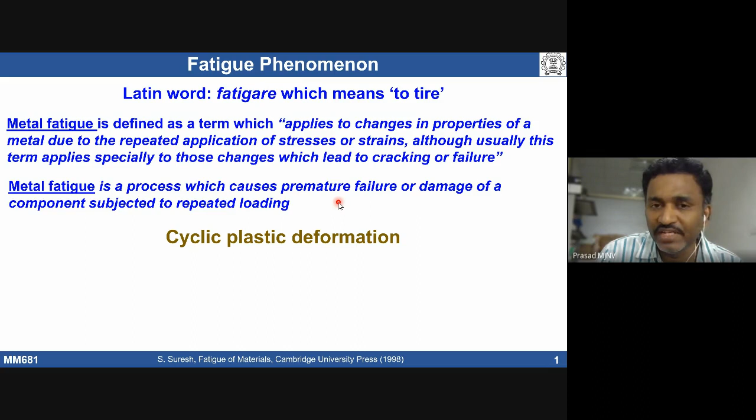So that's the definition of fatigue we discussed. In order to understand fatigue behavior of materials, for example a newly developed material, one has to establish some methodology to understand how this material behaves under cyclic loading conditions. There are different approaches people use: one is called stress life approach, another is strain life approach, and the third one is fracture mechanics approach.

Stress life approach and strain life approach basically involve taking a tensile specimen and subjecting the material to either changing the stress limits or strain limits, respectively called stress life and strain life approach. You monitor the total number of cycles required for the specimen to fail under the given set of stress conditions or strain conditions. If you use stress conditions it's called stress life approach.

Strain life approach basically relates to strain, varying the strain limits, subjecting the component or specimen between the strain limits. So life means actually how many number of cycles are required, or the material has experienced, before its failure.

It's basically called fatigue life. Once you define a strain amplitude or a stress amplitude, for that given amplitude, how many number of cycles are required for its failure? So that is called fatigue life.

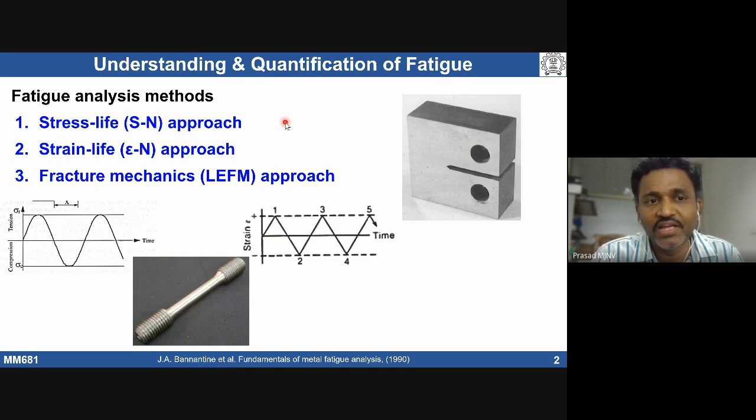Coming to the strain life approach, it is the most popular as compared to the stress life approach. For mechanistic purposes, if you want a better understanding of the fatigue behavior of materials, people use the strain life approach. But most steels have been studied using the stress life approach, which relates to high cycle fatigue. The stress life approach can be used for understanding high cycle fatigue. The strain life approach is mostly used for understanding low cycle fatigue, but it can also be used for high cycle fatigue.

High cycle fatigue involves most of the volume of the material undergoing elastic deformation. In case of low cycle fatigue, the major volume of the material is going to undergo plastic deformation. So that is the difference between high cycle and low cycle fatigue.

People have expressed mathematical equations to describe high cycle fatigue and low cycle fatigue. High cycle fatigue can be described using the Basquin equation, which relates stress amplitude or strain amplitude with respect to number of cycles to failure. Similarly, Coffin-Manson expresses how the strain amplitude varies with the number of cycles to failure. So one is for high cycle fatigue, the other for low cycle fatigue. If I want to know where the transition is going to happen, I have to equate these two terms. Then I can get where the transition from low cycle to high cycle fatigue takes place.

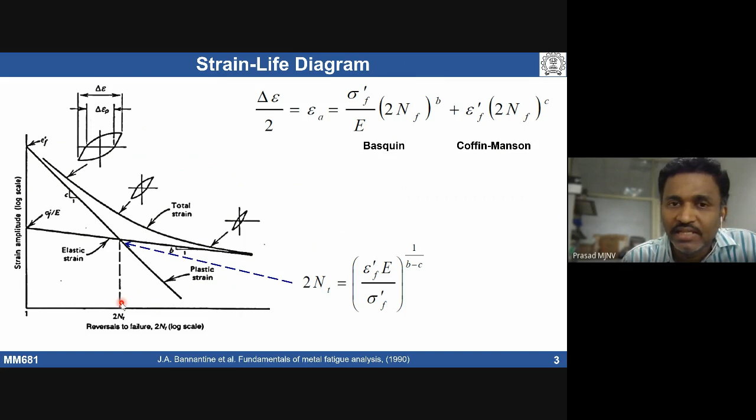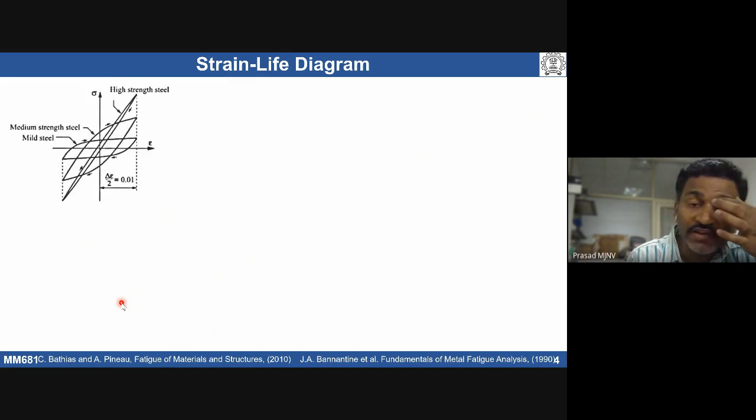I think we had one important discussion, about strong, tough and ductile materials, and how each is going to behave. If I construct an S-N curve, it can be a stress life curve or a strain life curve. How are these three materials going to behave? When I say strong, I'm talking about high strength material. When I say ductile, I mean mild steel, a low strength material. Medium strength steel is a relatively tough material as compared to high strength and mild steel.

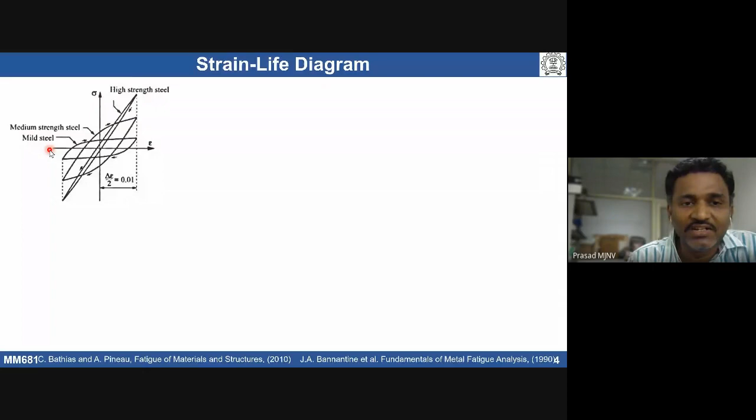If I take these three materials, typically in a high cycle fatigue regime, if I make a horizontal line, high strength material is going to behave better than low strength material. Look at it in the high cycle fatigue regime: high strength steel behaves better than mild steel, which is low strength. In case of the low cycle fatigue regime, it's going to be opposite. High strength steels, the strong materials, are going to have less fatigue resistance as compared to low strength materials, because this regime is related to plastic deformation, while this regime is related to the elastic regime.

So if we have a good amount of ductility, we can see the number of cycles required for the complete failure of the component is going to be more.

Similarly, another example: if I take a steel, one has been normalized by heat treating the material to austenite temperature and cooled in air. The other thing, you heat the material to austenite temperature and quench it rapidly, which gives a martensitic structure. Assume I have a medium carbon steel. Within medium carbon steel, the normalized one gives pearlite plus ferrite, and in the quenched one we get martensite, because martensite steels are harder in nature compared to normalized steel.

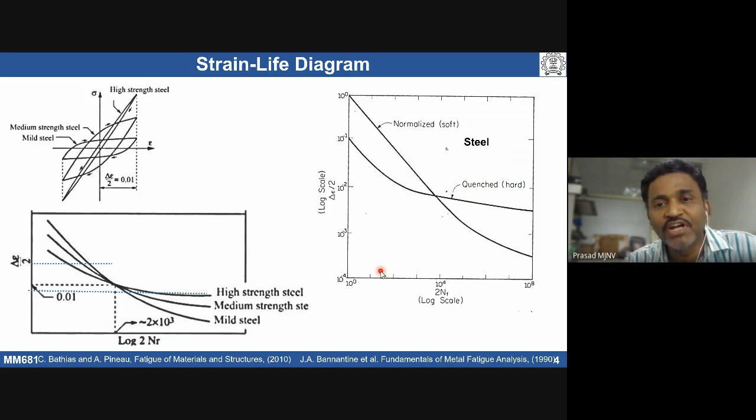So one has to be cautious while selecting a material for a given application. Upfront we have to know how many cycles the component is going to experience, and whether there is plastic deformation - that means the stress is actually higher than the yield stress or below the yield stress. Accordingly, you have to select the material. Material selection for low cycle fatigue is different than for high cycle fatigue performance.

Any doubts here? Am I online? Yes, sir. Sir, can you please explain why martensite has less low cycle fatigue life?

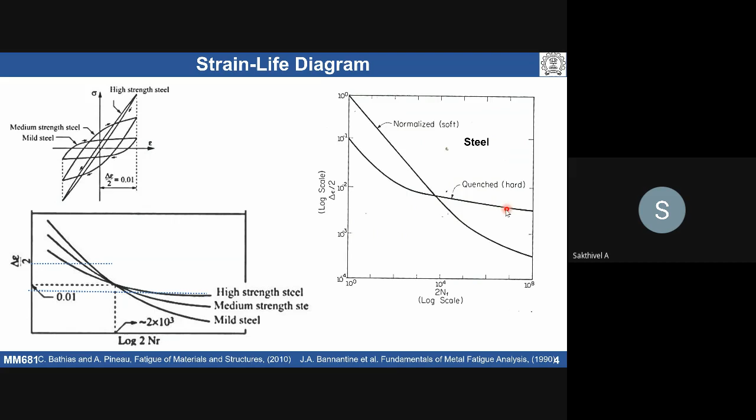If we talk about low cycle fatigue, cracks can easily be initiated. We are already subjecting this material to stress above yield, which means plastic deformation is going to take place. So because of this plastic deformation, a crack has already been initiated, and the crack propagation is very fast.

In martensitic steels it's very easy to generate more cracks compared to normalized steel. The martensite laths act as stress risers with sharp edges, so cracks are very easily created. The crack can be nucleated very easily and can also propagate very fast because we have limited ductility in hard martensitic steels.

In case of normalized steels, first of all the number of cracks initiated is less, and even those cracks will not propagate very easily - there is crack blunting taking place, so crack propagation is also controlled. That is the explanation for low cycle fatigue behavior.

When you talk about high cycle fatigue, we need to apply high strain amplitude or stress amplitude to initiate the crack. Only then do we see crack initiation, because we already discussed that the period for crack initiation is more than crack propagation in the high cycle fatigue regime.

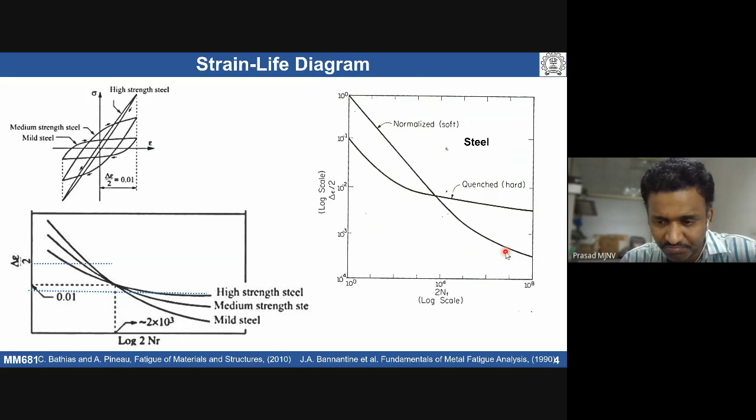Now let's continue the discussion on constructing the stress-strain curve under cyclic loading conditions. We subject the material to given strain amplitudes, define the strain amplitude, change it, and construct a saturated loop for each defined strain amplitude. Then connecting the locus of each saturated loop, we get a stress-strain curve under cyclic loading conditions. Interestingly, if I take cold worked material and annealed material under monotonic conditions, we see a significant difference in the stress-strain curve.

But if we subject these two materials individually under cyclic loading conditions, what happens? The annealed material gets cyclically hardened, whereas the cold worked material undergoes cyclic softening. This brings the curves together, since the cyclic deformation behavior will be different.

So an annealed material, which can get strain hardened, undergoes cyclic hardening. In the case of cold worked material, it already has enough dislocations, so it undergoes cyclic softening because annihilation of defects can take place, and persistent slip bands can form very easily. This leads to reduced strength under cyclic loading conditions. This is for polycrystals.

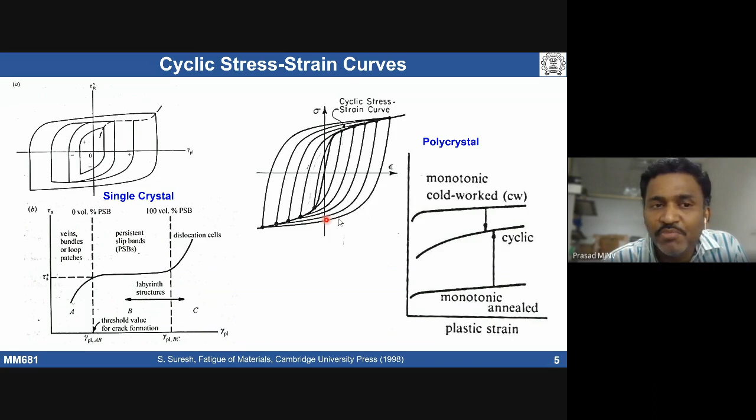These are examples from some materials showing this. In a single crystal, when you deform it, we see this kind of veins-like structure at low amounts of deformation. If you go to a certain amount of deformation, we see formation of persistent slip bands. These bands form as regions of relatively low dislocation density compared to the matrix -- this is the matrix, and this is the persistent slip band.

The persistent slip band is nothing but a rearrangement of dislocations, where annihilation occurs. When you deform material in different directions, changing between positive and opposite direction, annihilation of defects can take place very easily in certain locations, leading to formation of these bands, called persistent slip bands. A combination of persistent slip bands locally in some places, along with this cell structure, may give you a labyrinth kind of structure. This is the kind of characteristic microstructural feature we see when a material has undergone cyclic plastic deformation.

So, if at high magnification we observe formation of these persistent slip bands in a microstructure, we can say that a particular component has undergone cyclic plastic deformation.

Is it clear? I think I stopped at this moment in my previous lecture. If there are any doubts, please let me know before proceeding further.

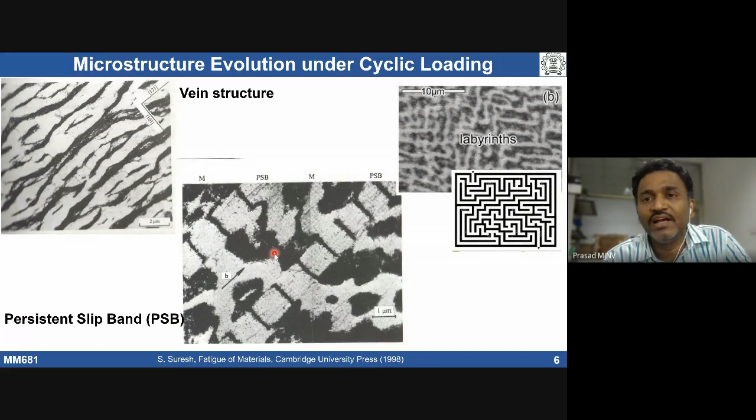So today I'm going to discuss how the crack is going to get initiated, how the crack is going to propagate under cyclic loading conditions. Now, crack initiation - what can lead to crack initiation under cyclic loading conditions? Any idea?

Stress concentrations, notches - stress risers are available, and stress concentration can always lead to crack initiation. The stress risers can be of two types: internal stress risers and external stress risers. When I say internal stress risers, any examples for internal stress risers in materials?

Typical internal stress risers: material segregation, particles, inclusions, dislocation density particularly in some specific places. Actually, dislocation density is not really something we can call an internal stress riser, because there isn't really concentration - if a cell structure forms, it will not act as a stress riser. But stacking faults, defects like grain boundaries, twin boundaries, faults - these can act locally as intrinsic stress risers.

Coming to external stress risers - examples include change in area, surface roughness. If you have a lot of roughness, or something sitting on the surface, or a design fault with sharp corners, those will act as external stress risers.

Yeah, I think you're close to that. All these last four factors we discussed are common whenever there is fracture in the material. But under cyclic loading conditions, there is an activity called cyclic slip activity that takes place. This cyclic slip activity can generate stress risers during deformation under cyclic loading conditions.

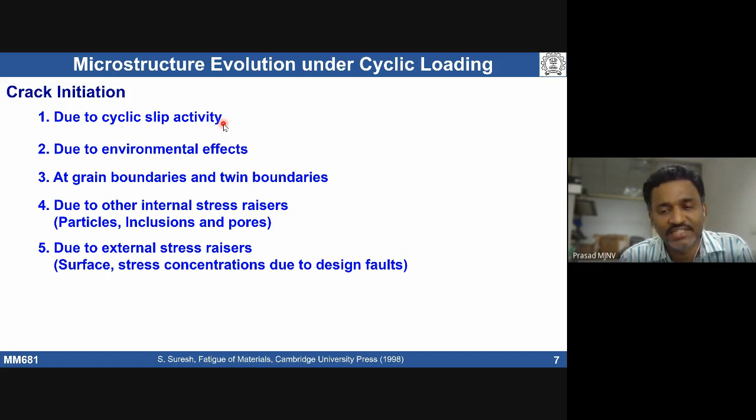So what is the meaning of cyclic slip activity? I think the other things are already known to everybody - all these stress risers, internal and external stresses, can lead to crack initiation.

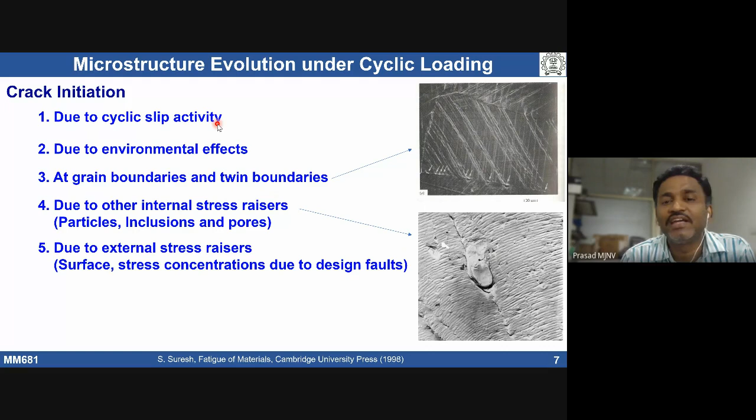Under cyclic loading conditions, we do see cyclic slip activity. This slip activity can lead to formation of internal stress risers. What is the meaning of cyclic slip activity?

Assume that at a certain location we may see some stress concentration develop. How does it develop? When I deform a material cyclically, even though I'm deforming it below yield stress, at certain locations the stress can rise locally, which can lead to plastic deformation.

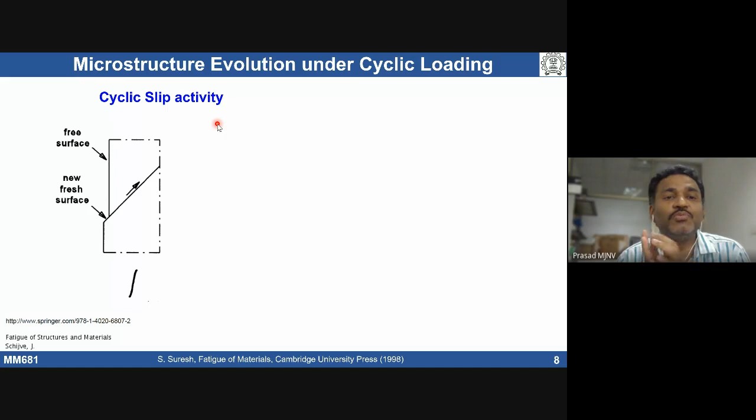When there is plastic deformation, that means there is shearing activity taking place. At the surface, when I deform a material—take a single crystal—and deform it around the loading direction, I apply stress up to maximum peak stress.

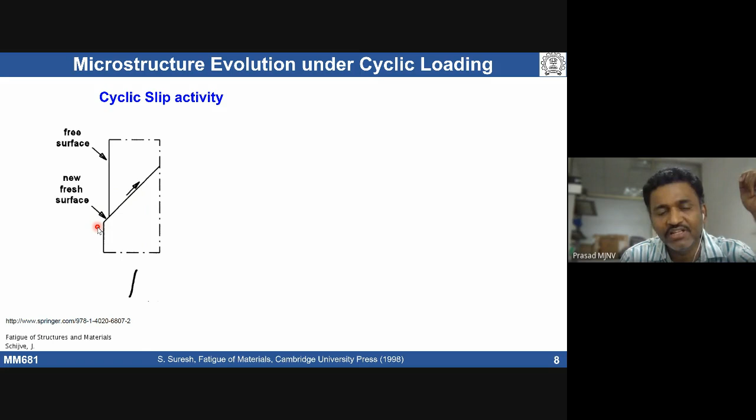Plastic deformation basically involves shearing activity, so this shearing activity at the free surface generates some new fresh surface. When I decrease the stress, that means I'm applying stress in the other direction now.

So when I'm decreasing stress and applying stress in the other direction, assume I'm applying tension-compression, what happens? This surface now has shearing activity in the other direction. Again we do see shearing activity, but opposite. So depending on the stress—tension or compression—we apply, I see this kind of slip activity locally at certain locations.

Near some surface, we see slip activity—that's what we're talking about, cyclic activity. We are changing the stress, high to low, low to high, and that can lead to local slip activity, giving rise to formation of slip bands.

So near the surface, we see some kind of intrusion form in the material if the initial slip activity happens in one direction. If the slip activity happens in the other direction initially, we're going to see an extrusion kind of defect form.

If these things form, locally it becomes like a void. This can act as a stress riser for further crack initiation. So whenever there is cyclic slip activity in the material, it can lead to formation of intrusions and/or extrusions.

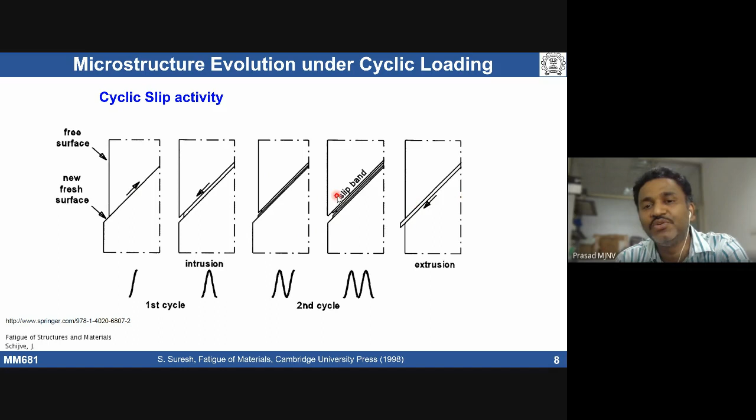Depending on which direction the shearing activity happens, that can lead to intrusions and extrusions in the material under cyclic deformation. Those then become crack initiation sites, acting as stress risers in the material.

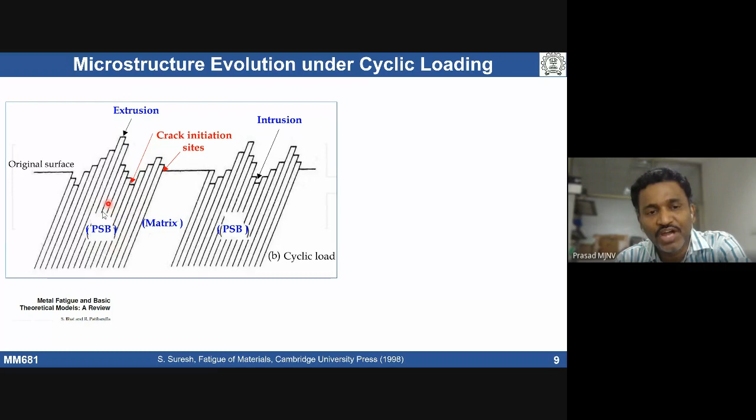So the formation of intrusions and extrusions can eventually lead to persistent slip bands at high magnifications. If you go to high magnification, you see formation of persistent slip bands in the material.

If I take a tensile specimen and polish it very nicely, then do cyclic slip activity, I see formation of these marks on the surface. If I go to a little higher magnification, I see a kind of valleys and hills.

The valleys are basically called intrusions—the cracks we see are like valleys, these are called intrusions. What we see as hills are called extrusions. Formation of intrusions and extrusions is also because of cyclic slip activity. This is another characteristic feature we can see during cyclic deformation of a material.

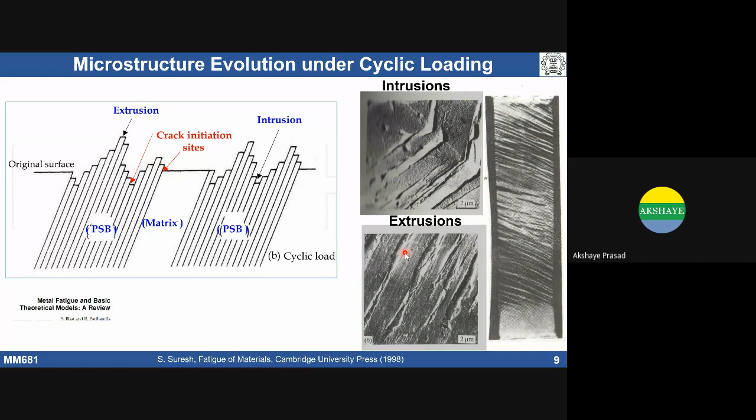Student: Sir, these stresses that we are applying, should it be completely reversed type of stress? Professor: Not necessary. It can always be tensile itself. Tension, compression, tensile - all can be there.

There are different types of cycles which I did not discuss here, but which I discuss in another course. In MM733 I will discuss about different types of cycles, what you see, what you encounter.

In all these cases, the stress is not necessarily tension-compression only.

Student: So this will be a surface phenomenon only, or in between also? Professor: Fatigue crack always gets initiated at the surface. Surface preparation is very much important.

So fatigue is a surface phenomenon. The surface is the most dangerous spot for the crack to initiate under cyclic loading conditions.

So this is how actually, this is another microstructural feature, though at a different magnification we talk about. We may see this formation of hills and valleys on the surface, which basically indicates that there is a cyclic deformation activity happening on the material.

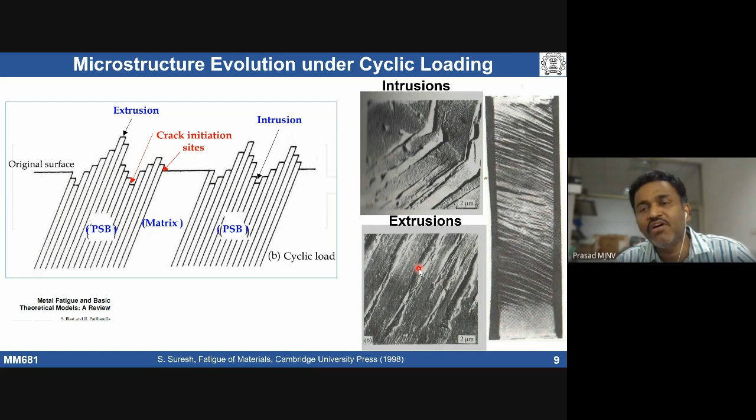Even if I apply stress, my applied stress is actually below the yield stress. If I assume there is a minute crack, whatever crack has been initiated can lead to further deformation happening around the crack region.

So the crack tip - in front of the crack tip - the stress is going to be less than sigma naught or greater than sigma naught. How much is it going to be? Any idea?

At the crack tip - now I'm applying, for a bulk material, a sigma naught. Just assume that the stress is relatively lower, slightly lower than the yield stress of the material. So some slip activity happens, cyclic slip activity happens in some places, because in some directions, some angles, the stress is sufficient to initiate yielding in the material. Micro yielding can take place.

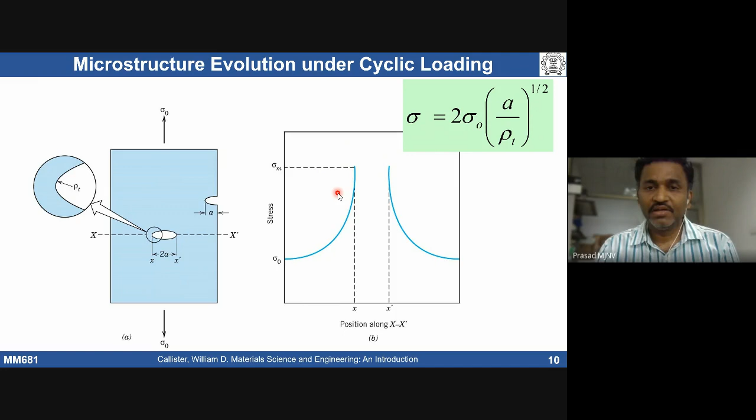So this is how cracks play a role, or any stress riser present, that leads to higher stress, causing failure of the component under cyclic loading conditions. This is basically stress concentration from cracks, what you have learned so far. So now the crack has been initiated.

So how is this crack going to propagate under cyclic loading conditions - crack propagation, how is it going to take place. This slide shows how the crack propagates under cyclic loading conditions. Assume that after a certain number of cycles, the crack has been initiated. How is this crack going to propagate during further cycling?

Assume this is a crack of this shape. Now I apply stress from A to B. What happens? The crack front is going to be sheared, pulled. There will be some shearing activity taking place in front of the crack tip. This crack front is going to move because of plastic deformation - we are applying some stress, so there is shearing activity taking place.

We are going to see, because around the tip the stress will be very high, that can lead to plastic deformation - meaning shearing activity is taking place, which pulls the material. So this shearing activity can pull the crack front.

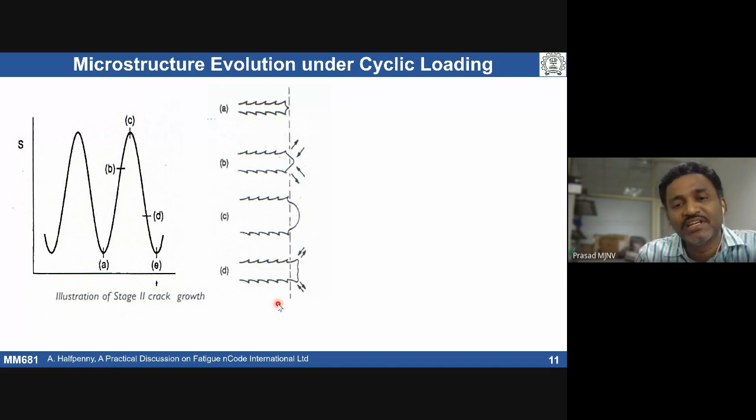When I drop the stress to minimum, applying stress in the other direction, we see shearing activity taking place in the opposite direction, which can lead to some blunting - the crack can get blunt. But when it comes down to point E, it can become sharp again, because a lot of blunting has taken place.

Finally, the front has moved from one location to this location. This much movement has taken place when you apply one cycle - stress from minimum to maximum and maximum to minimum. The crack front has moved due to local plastic deformation shearing activity, so we see the bulging, then in the reverse direction when dropping to minimum stress, we see some kind of blunting. Then we are left with an extended crack.

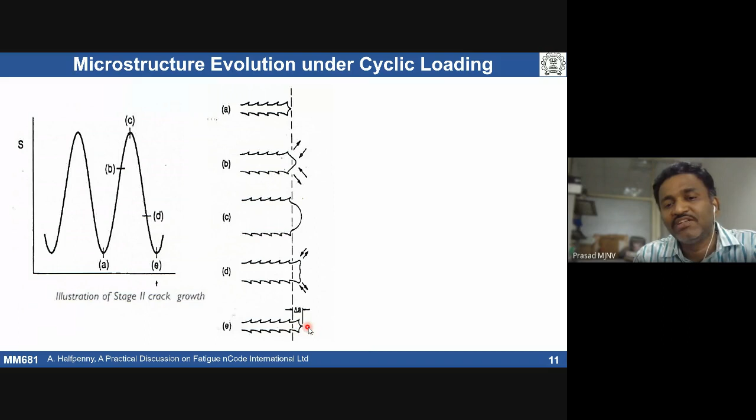So this is how one cycle can lead to the crack front moving a certain amount of length, depending on how much stress you are applying - that changes how much front extension has taken place.

So one can summarize this in different ways. Usually crack opening occurs, crack at maximum load, and then the crack closes. Finally the crack has been closed, but at the same time, the crack front has moved a certain length, extended a certain length. This whole process is called plastic blunting process for crack growth. The mechanism proposed is basically called the plastic blunting process for crack growth under cyclic loading conditions.

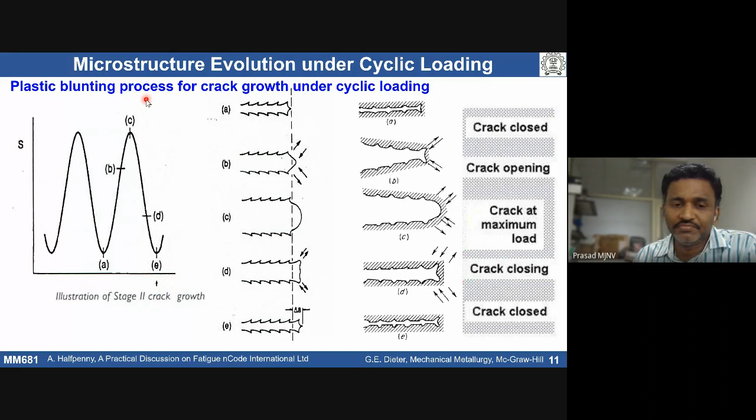Is it clear about the crack? Because initially we had discussed crack initiation, now crack growth under cyclic loading. Is it clear? Yes, sir.

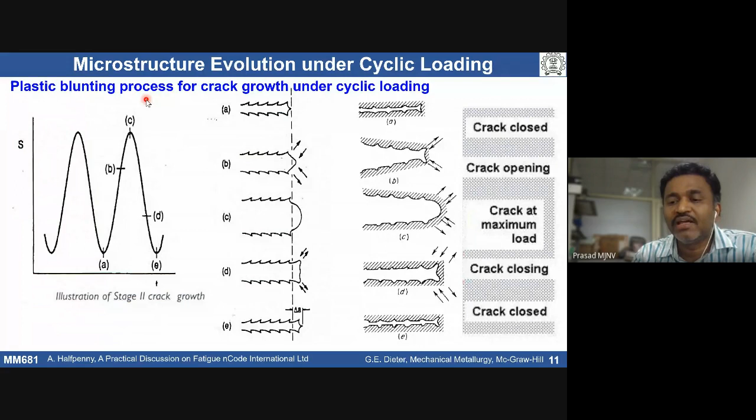So this crack propagation can lead to certain microstructural features. For example, if you take a component which has failed, you can see formation of beach marks. This is an indication that the material has undergone cyclic loading conditions, that the component was actually subjected to cyclic deformation.

So by looking at fractography, even with a naked eye, we are able to see beach marks, beach mark kind of shapes. This basically indicates that the material has undergone cyclic or fatigue failure. This is how people do investigation into how a particular component failed, whether due to fatigue loading conditions, monotonic loading conditions, or something else like shearing activity, by looking at the fractography. With the naked eye, one can see these beach marks.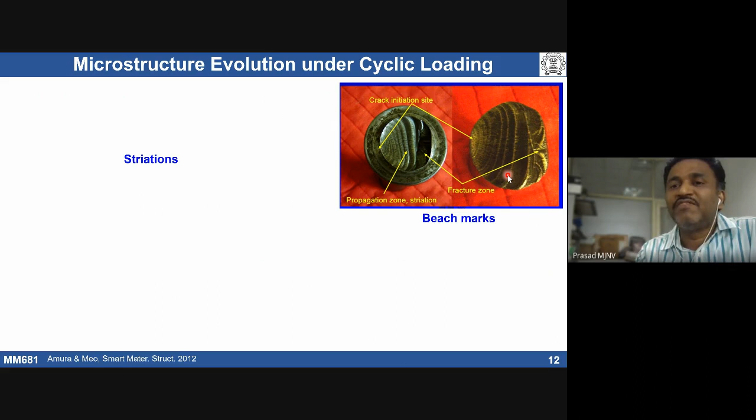If I go to SEM level fractography, we do see formation within a grain of this kind of marks. These marks are called striations. Each striation, from one to the next, basically indicates that the crack has propagated for each cycle. We already learned that the crack front moves for each cycle, so within a grain, by looking at how many striations are there, people can say how many cycles the material has experienced for the crack to propagate.

So these are the microstructural features which indicate that the material or component failed due to cyclic loading conditions. Is it clear? Yes, sir. So this is how actually, because I'm connecting microstructure evolution under cyclic loading conditions.

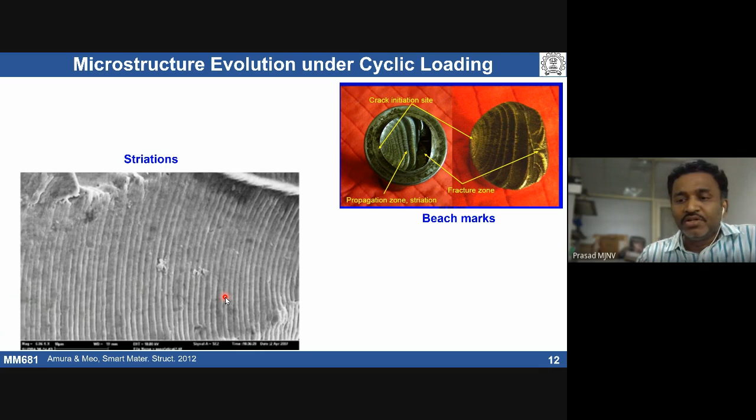So another important thing, because we always talk about it, is the fracture mechanics approach. One has to understand how the crack is propagating, how the crack is propagating with number of cycles. The fracture mechanics approach basically involves taking a compact specimen and monitoring the initial small crack, how it is propagating, with a given stress amplitude or stress range.

Here, for example, stress range means sigma minimum, sigma maximum, and stress amplitude is sigma maximum minus sigma minimum by 2. Here I've given two different stress ranges, delta sigma 1 and delta sigma 2, assume delta sigma 2 is greater than delta sigma 1. It's obvious that if the stress amplitude or stress range is more, the number of cycles to failure is going to come down.

So what people do is, for a given stress range, monitor how the crack is propagating with number of cycles. With increasing stress range, the number of cycles for propagation is going to come down because you are giving more stress, so the propagation will be faster.

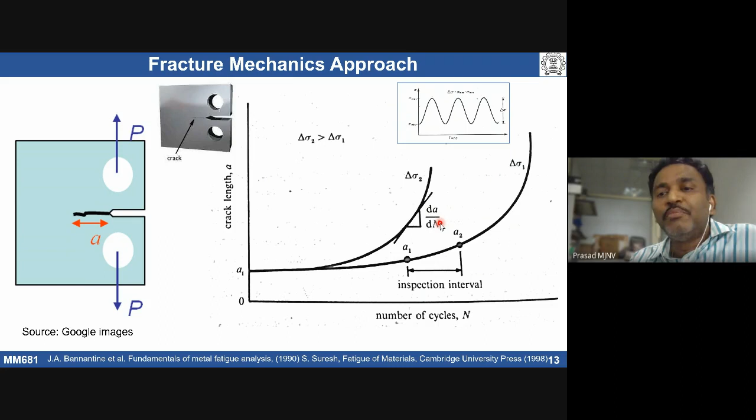People do establish crack growth rate for different materials by taking a stress intensity factor range, delta K. We know the stress intensity factor K is equal to some geometric function times sigma times square root of pi A, where A is the crack length. This is how stress intensity factor is known from a fracture mechanics approach.

Delta K is basically delta sigma square root of pi A, with respect to stress intensity, because under cyclic loading conditions we are giving delta sigma or sigma A, where sigma A is delta sigma by 2. So in cyclic loading conditions we need to talk about stress intensity factor range, because we are changing the stress minimum and maximum, and monitor how the crack growth takes place for different stress intensity factors.

If I look here, initially there won't be any crack growth. After reaching some threshold delta K, we start seeing the crack growth begin to take place. So initially we have a stage, regime 1, regime 2, and regime 3 - there are three regimes as a function of how the crack growth rate changes with stress intensity factor range. Typically, materials exhibit this kind of sigmoidal shape curve.

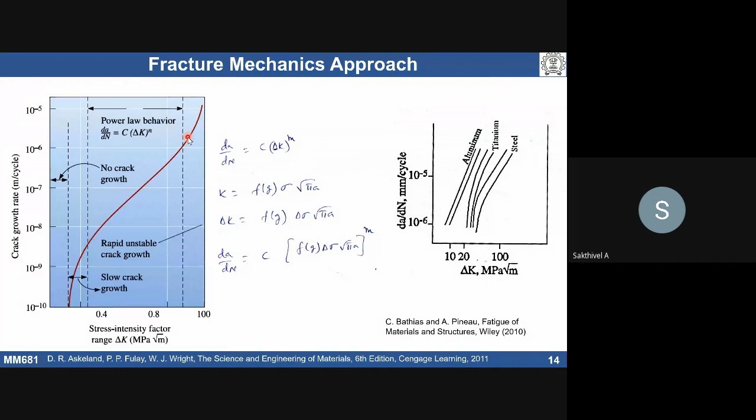So there is no, we never get a perfectly smooth surface, because even at the atomistic level we do see some roughness. So it depends at what level of magnification you are looking at the roughness. Ideally we never get a perfectly smooth surface. If you learn about fractals, there we see that going deeper and deeper, we still see rough surface present. Only the magnitude of roughness is going to change.

So people have established that a smooth surface finish, like diamond polishing, can have a better, improved fatigue performance than only a rough oxide layer. After deoxidation, if you do that, you'll get some rough surface, and that is going to be detrimental for the fatigue. So the level of roughness can influence the fatigue behavior of a material.

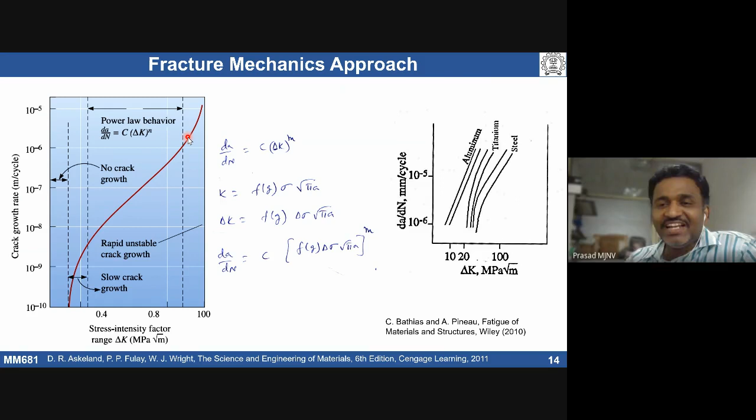Is it clear? Usually we cannot go for a component and do diamond polishing, because the cost will be high. So you can never get that ideal finish, it is subjected to some kind of cleaning, like acid cleaning, so that you can minimize the roughness as much as possible.

In the other course, MM733, I will discuss about the factors which can influence this. Here I don't talk much because we have a lot of content to be covered. On top of it, I have to say only how the microstructures are actually evolving, that's basically the theme of this course: plastic deformation and microstructure together. So I'm just giving some important aspects related to plastic deformation and how this can lead to microstructure evolution in the material.

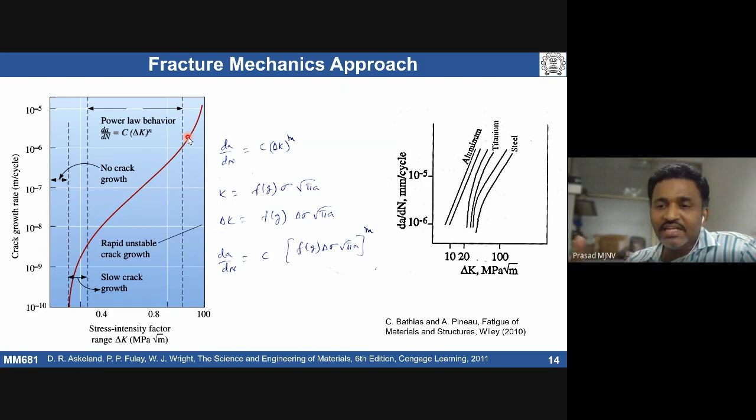Is it clear? Yes, sir. So the next important topic, I do say everything is important because I'm covering only some of it, the plastic deformation is a huge subject. So I'm just taking some important concepts related to plastic deformation.

So the next one, thermally activated plastic deformation of metals. Can anybody say what does it mean? That name itself should indicate, any idea what does it mean? High temperature plastic deformation? Okay, it's not necessarily high temperature, it's temperature assisted. So plastic deformation can be activated, meaning some thermal process can assist the applied stress for the plastic deformation of metals.

So plastic deformation of metals is dynamic in nature. What is the meaning of dynamic in nature? Time dependent. Plastic deformation is a time-dependent process. In 1925, a scientist called Becker indicated that there will be some thermal vibrations, thermal and temperature changes that can assist the applied stress for the plastic deformation to take place. This dynamic nature is basically coming because of thermal fluctuations which assist the applied stress, so that we can overcome obstacles present in the material.

Plastic flow is basically related to dislocation movement, slip activity, gliding activity. The dislocation activity, the dislocation movement, can lead to plastic flow in the material. The dislocations, while moving from one location to another at the atomic level, will face some resistance to the dislocation motion.

We already discussed there is an inherent resistance by the crystal to dislocation motion. What is that inherent resistance called? It's the Peierls-Nabarro stress, the stress required to overcome the inherent resistance of the crystal to dislocation motion. Basically expressed as energy, it's Peierls-Nabarro energy, and if you convert it into stress, it's Peierls-Nabarro stress.

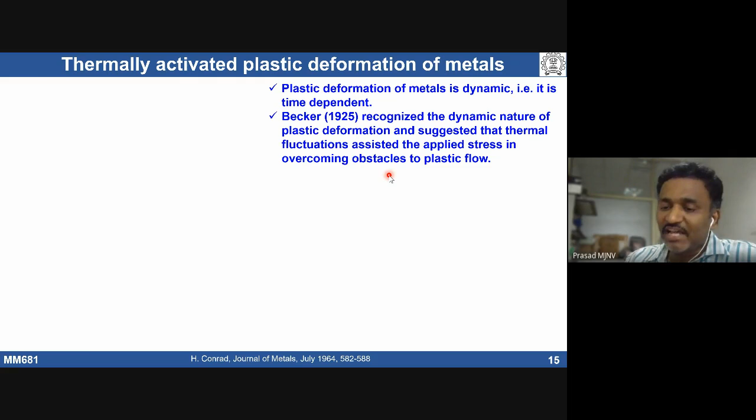These obstacles are actually of two different types. Some obstacles will have a long range stress field, and some obstacles will have a short range stress field. Assume I have a crystal, some material, in that we have some obstacles. Some obstacles can have a long range stress field, some will have a short range stress field. When do you say long range versus short range stress field?

Long range stress field is related to at least a minimum of 10 atomic diameters or more. The obstacle size, if you take a particular material and know its atomic radius, at least the diameter has to be 10 atomic diameters or more, that basically involves long range stress field. If the obstacle size is less than 10 atomic diameters, that basically involves short range stress field.

So these are two different types of obstacles present. This long range stress field cannot be overcome by thermal fluctuation. That means thermal stress fluctuations, if you give some temperature change, will not overcome the long range stress field obstacles. So those barriers are called athermal barriers.

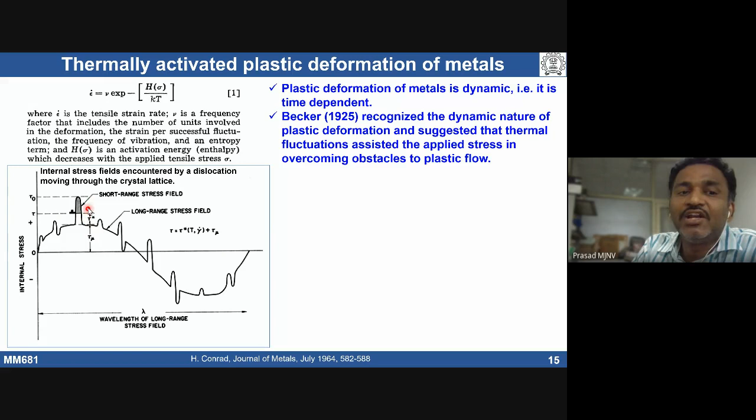Out of tau naught, tau mu is basically the stress required to overcome athermal barriers. And tau star is the stress required to overcome thermal barriers. So total stress required tau naught is equal to tau mu plus tau star at any given temperature.

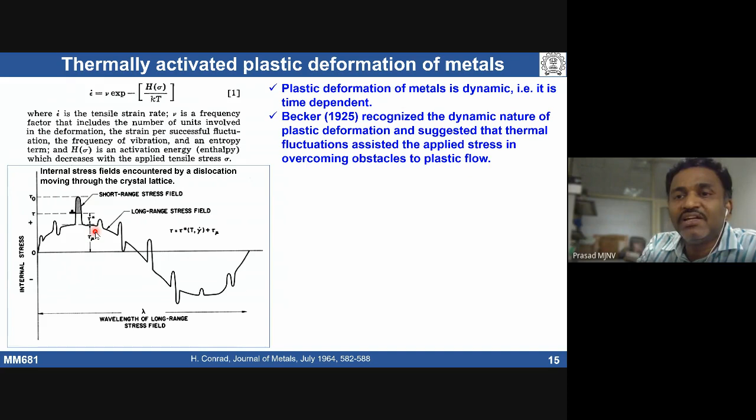At any given temperature, the total stress required to initiate plastic deformation, plastic flow in the material, I need to apply tau naught. That is equivalent to tau mu, stress to overcome the athermal barriers, plus stress to overcome the thermal barriers.

Now at 0 Kelvin, where there is no temperature, what we see is at a particular strain rate, if a material is deformed, here I've taken two different strain rates, gamma 1 dot and gamma 2 dot.

So these two strain rates, increasing strain rates, at 0 Kelvin I need to apply a tau naught stress. With increasing temperature, at a particular strain rate, the stress required to overcome thermal barriers is going to come down, but the stress required to overcome athermal barriers is not going to change.

After a certain amount of temperature, the stress required to overcome all the thermal barriers is going to be zero. That means I need to apply only the stress required to overcome the athermal barriers. Depending on strain rate, higher the strain rate, I need a higher thermal stress. Your athermal stress is not going to change, only thermal stress changes depending on the strain rate.

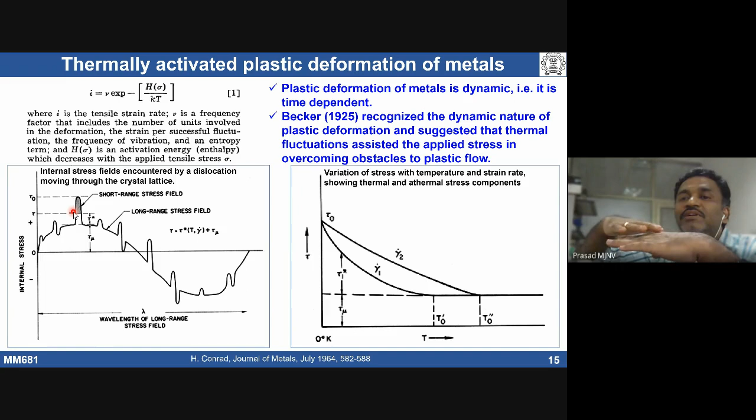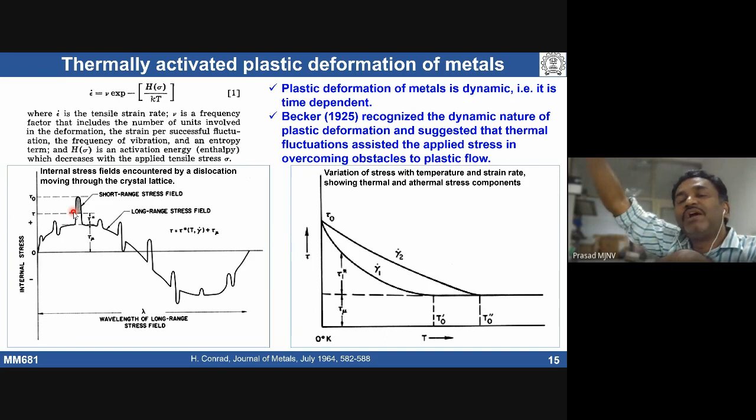Another example: dislocation on different planes, different slip planes - it requires a lot of energy to overcome, to undergo deformation in other direction, another slip plane. So dislocations on other slip planes is another example for a long range athermal barrier.

In case of thermal barriers, can anybody guess some thermal barriers which are small in size? The size of the barrier is small.

No. Okay, Peierls-Nabarro stress itself is one of them, because we are talking about atomic level, less than 10 or within 1 to 2 atoms, resistance will be there. So that can give - one minute.

Hello, yeah. So the thermal barriers is already given. Thermal barriers - one best example is Peierls-Nabarro stress, which basically involves atomic level, 2 to 3 atoms spacing only. And other thing, forest dislocations.

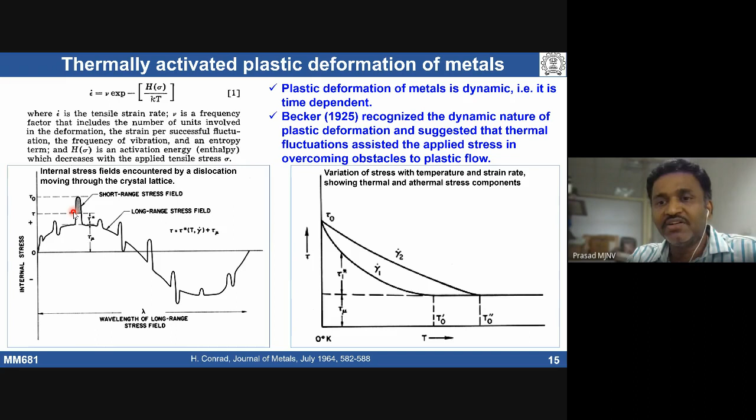Forest dislocations, because dislocation is going to thread the gliding planes. Forest dislocations are present and those can act as barriers. Lomer-Cottrell locks, which are also barriers, small, within atomic level, those barriers.

Cross slip activity, going from one plane to other plane - the cross slip activities can also be thermally activated. Climb activity, what you're seeing, that also can be thermally activated. Climb process can also be.

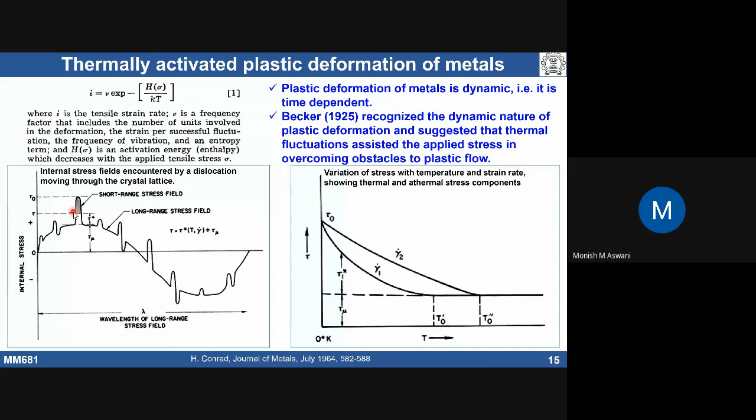Hall-Petch constants can also be considered. Hall-Petch constant is not a barrier - basically all these things can contribute to Hall-Petch constant. Barriers can constitute it.

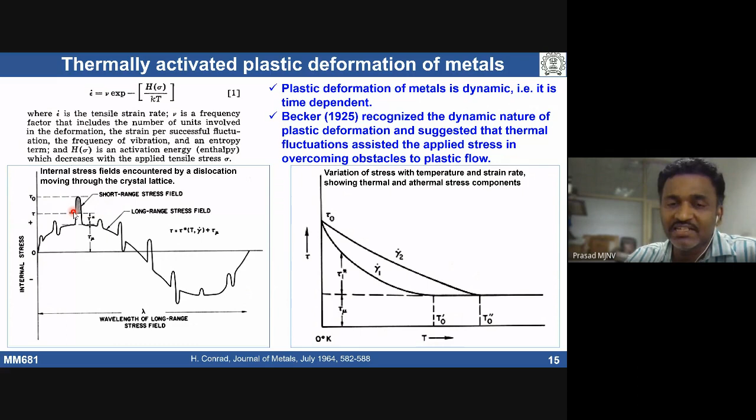What I'm asking is what are the thermal barriers you see in crystalline materials. So these are the thermal barriers: overcoming Peierls-Nabarro stress, intersection of forest dislocations. Basically forest dislocation can thread the dislocations - gliding planes can be threaded with dislocations, which involves all kinds of barriers like Lomer-Cottrell locks. All of them can control the gliding activity, and non-conservative motion of jogs, which are of small atomic sizes, cross slip activity and climb activity - all these things come under the category of thermal barriers.

That means these can be thermally activated - by giving temperature I can activate these things, I can easily activate this defect, these barriers. So these are called thermal barriers. So this is another important point.

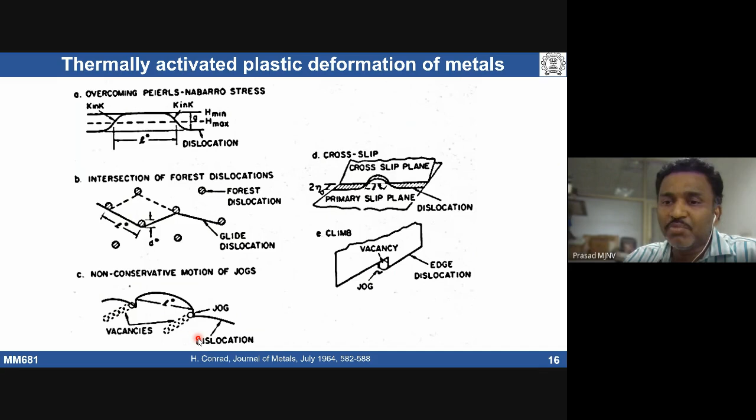I just introduced a concept - we already discussed activation energy and activation. Another important concept is called activation volume: the change in activation energy with respect to shear stress is called the activation volume. With applying stress, the enthalpy of activation is going to decrease - this minus dH by dTau is called activation volume. Each of these thermal barriers will have a particular activation volume.

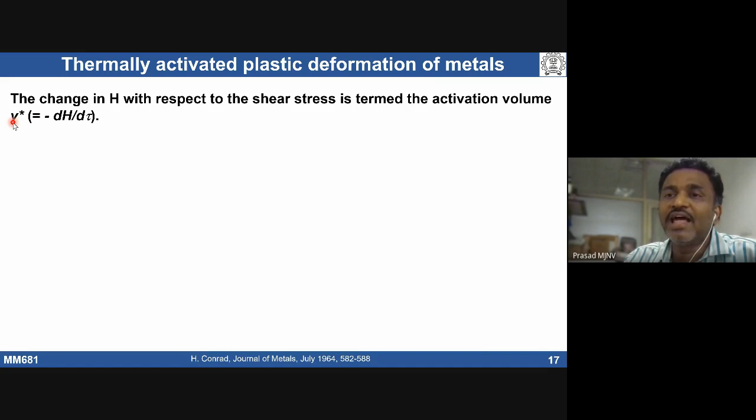Controlling the rate controlling process is climb. If the activation volume is found to be between 10 and 100 b-cube, that means the deformation has a rate controlling mechanism related to cross slip. So between cross slip and climb, which is the dominant rate controlling mechanism? You assess this by determining the activation volume. Activation energy gives some indication, but activation volume tells you what kind of rate controlling mechanism applies for a particular plastic deformation mechanism, whether it's cross slip or climb controlling the overall plastic deformation. So one has to determine the activation volume.

I'll stop it here. We will discuss in detail about some more things regarding activation volume, how to determine it, and what is the theoretical basis for the activation volume, in my next class. If there are any doubts, please let me know.